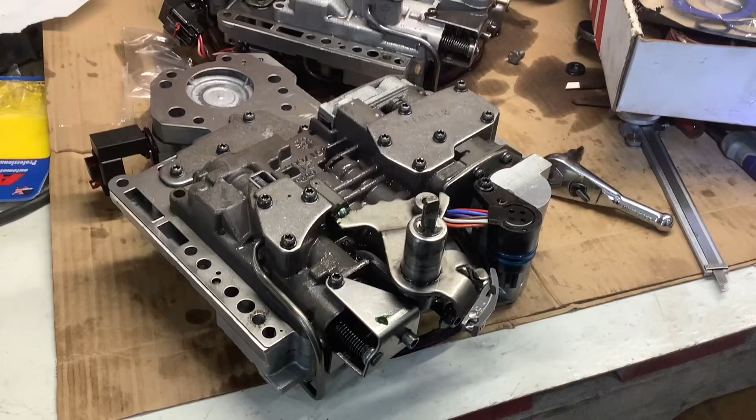So everything has been done to it. I made sure the adjustments are correct. I went ahead and swapped this out, and this was actually loose. So what I did was I got a bolt and I stood the bolt up, and I got a pair of channel locks, and I just squeezed it together, and that essentially made this a little tighter. It doesn't wobble around.

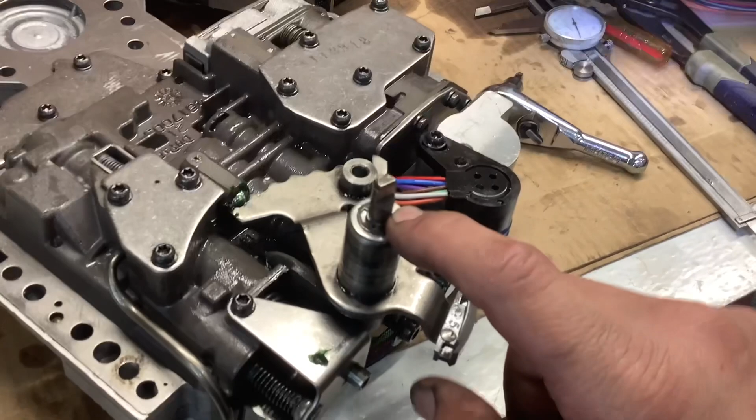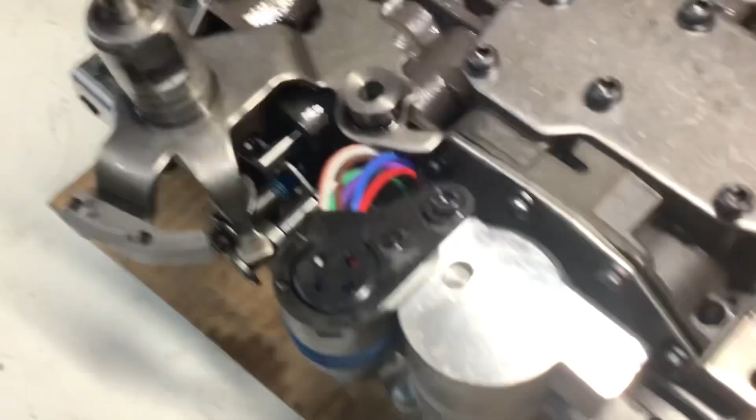I replaced the seal here. I'm going to be replacing the seal in the transmission. The adjustment here for how long the distance is from that curved piece to the plunger, that needs to be a certain distance. And that distance, how I got that was put the distance here, which is 625.

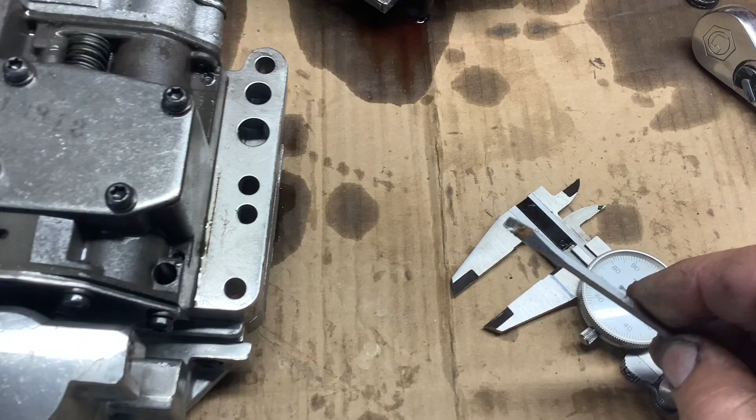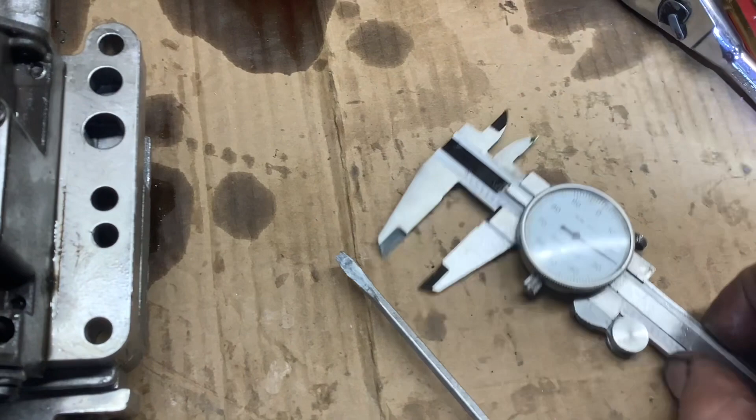I got a marker, and with the white marker, I painted this. And then all I did was scribe the white line on the screwdriver. Went over here and pushed down the throttle valve and aligned the white mark. I don't know if you could see that. I'm looking through the screen, so let's see if I can do this. And you have to make that adjustment with this collapsed all the way down. And with it collapsed all the way down, I just lined the scribe mark out with the crescent right here. And that's how I got the depth.

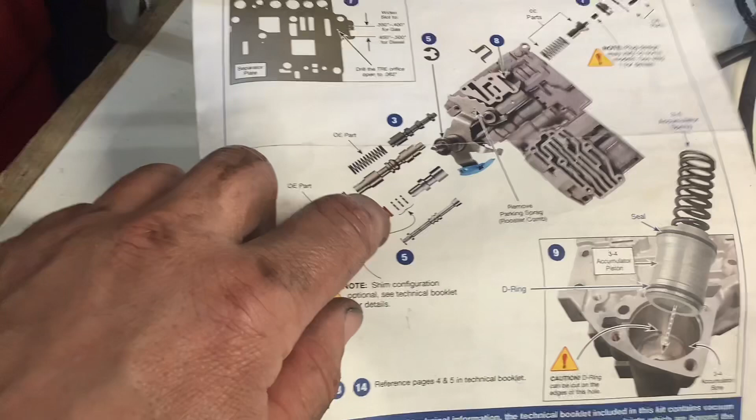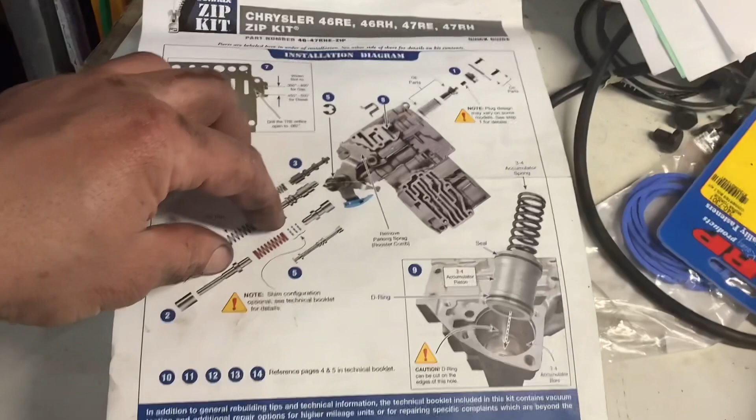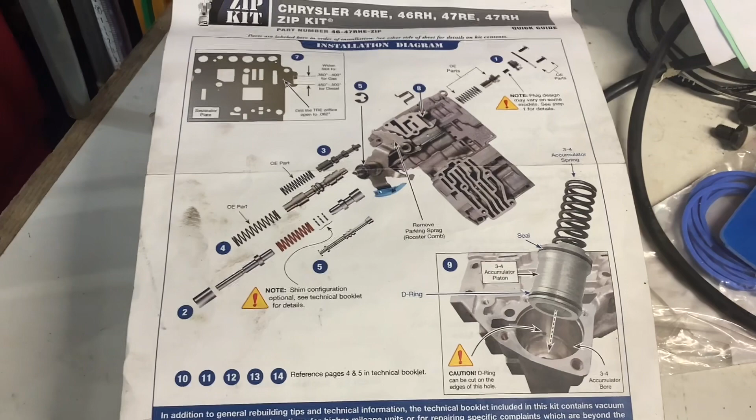There is one spacer. I used one spacer. This is a stock transmission. I didn't want to delay the shift. This, as you gain speed in the transmission, the pressure goes higher and higher and higher. The more spring pressure you have here, the more delayed the shift is. So I wanted to delay just a little bit. So I upped it 7 psi, which is basically one spacer. And that's 14 psi. And that's outlined in the instructions.

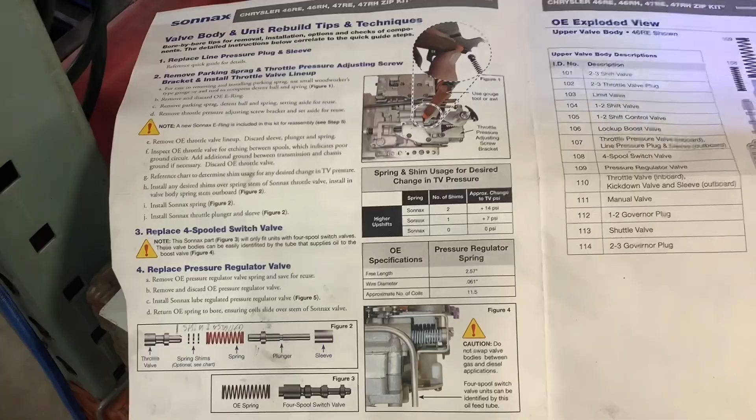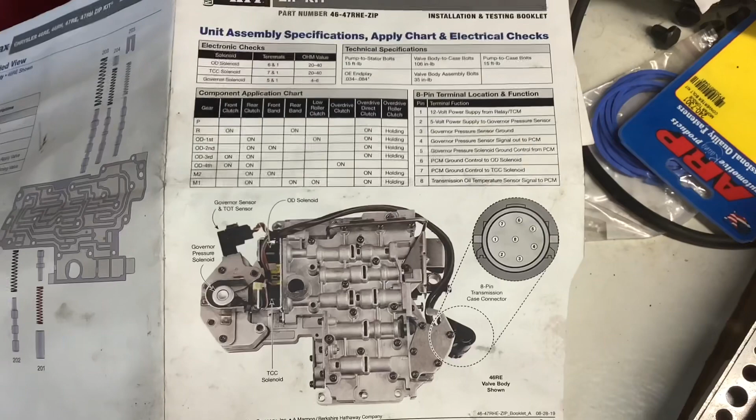Which would be, ta-da! All right there. Sorry if it's shaky. Sometimes these high pixel cameras are very sensitive to movement. And of course, these are all pressure related if you want to delay or do anything like that. There you go. Some information here. The shift kit. So that's about it. That's what I've done.

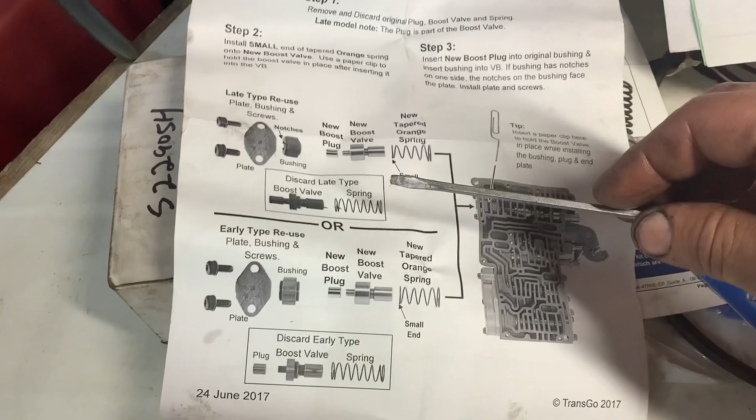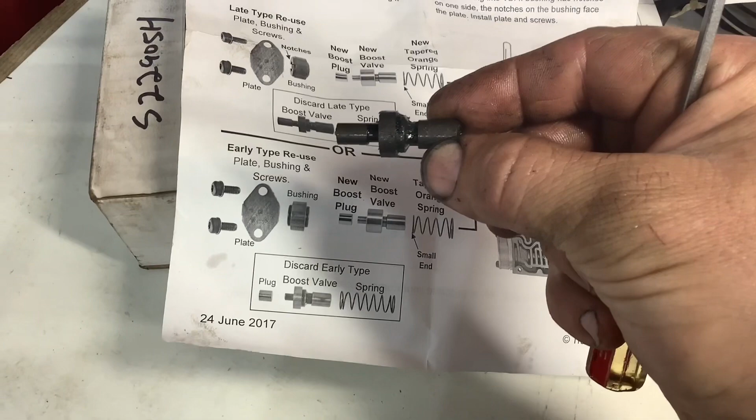The boost valve's been replaced. I had, what is that? It's driving me nuts. Oh, just some garbage. There we go. So this is the one I had. You got two different types. At any rate, you want to discard them and put the new boost valve in its place. Here's the old one. And that's just assembly lube for the transmission. Here's the old spring. Here's the old valve. This is the old style, see? And of course this is the new style installed. So that's where I'm at.

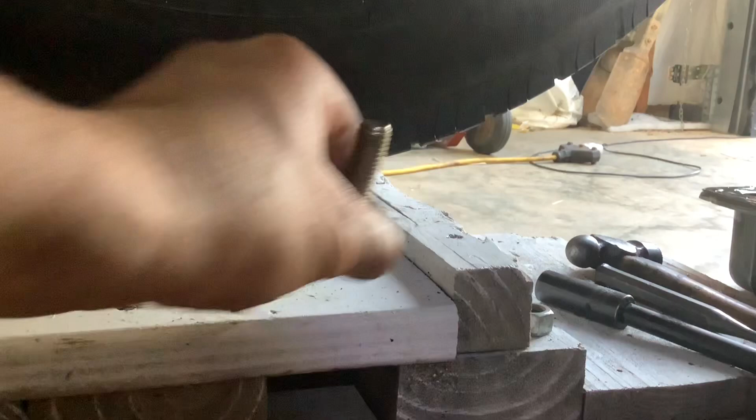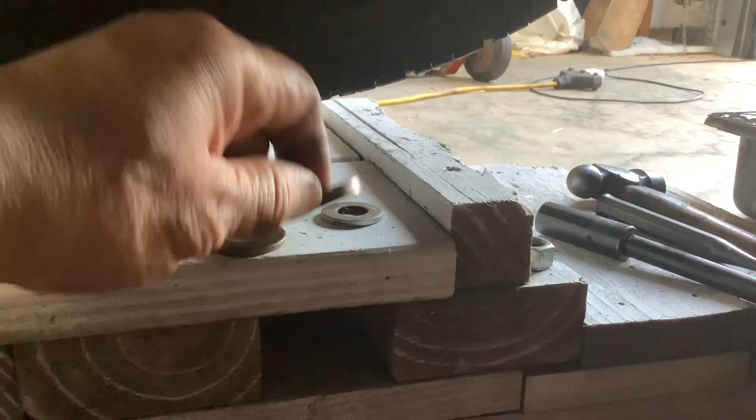And I'm also going to be replacing this seal. I'll explain that. So here's where I'm at. This is how I do this. I get a bolt. I get a washer. Put the seal there on top. Run the bolt through. Put the washer on the bottom. And of course, tighten it up.

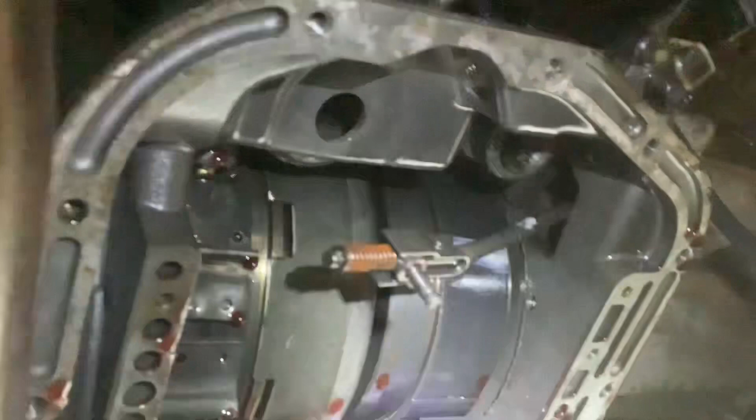It appears that this has been rebuilt. It's just got a little bit of incorrect information on how to shift. So I'm going to adjust the bands. I did not put that white stripe there. That was there on that reverse band. So that's it in a nutshell here. I'm going to adjust these bands, put that seal in, and start putting everything together. I just got to replace this connector.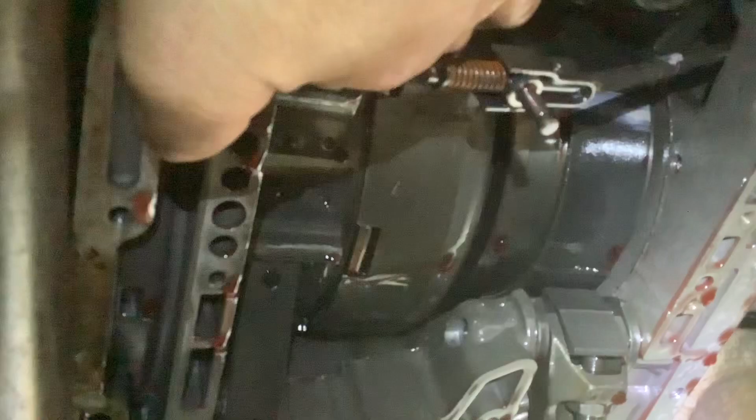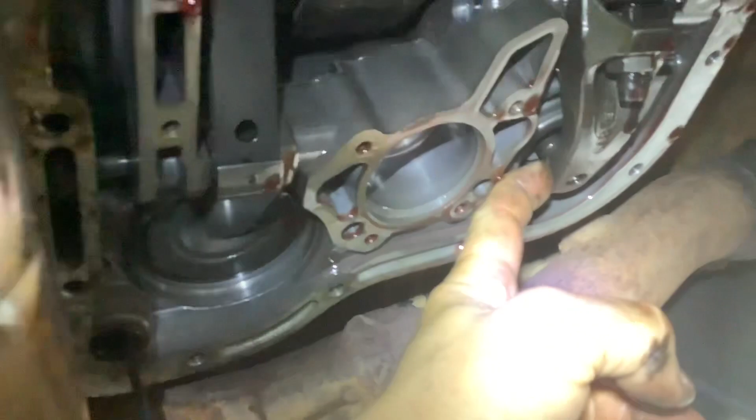So that's where I'm at. I gotta adjust this still. It's not bad, but of course I'm just gonna check it. And all the material on the bands, it really looks decent. So I'm just gonna adjust them and do that. This is actually, I don't know why it was hanging up before. I did work it a couple of times and it seemed to clear up. So I'm just going to leave it at that. I'm going to test it, okay? And if it doesn't spring back like it should, and the test port's here, just add some compressed air and it should apply, and then immediately when you take the air out, it should return to the rest position.

And again, make sure your transmission is cleaned. It is paramount that you keep the contents in here clean. That's why I power wash what I can. And as you can see, even power washing doesn't get everything, because you're up underneath the vehicle and you can't get the wand in certain places. However, I'm going to make a curved end for the wand so I can get in those tight areas. All right.

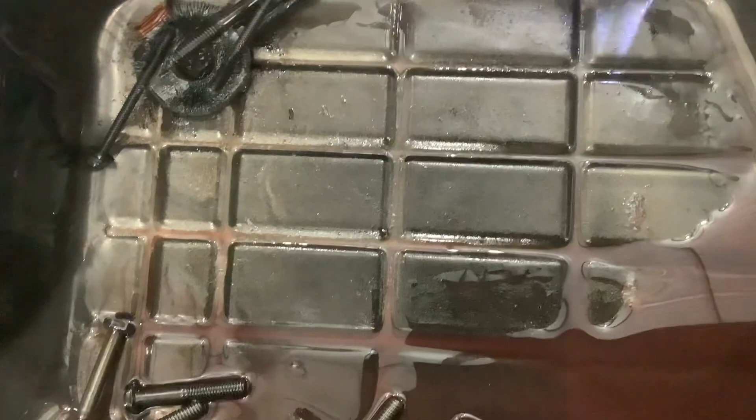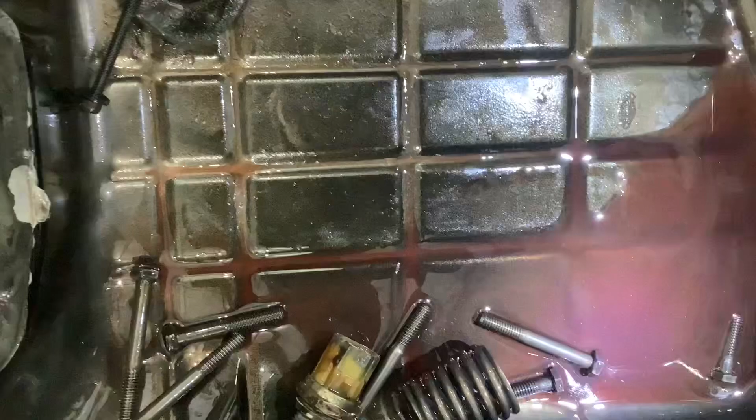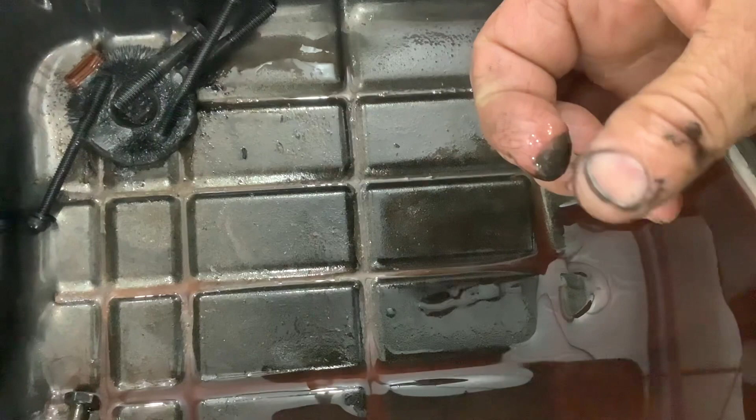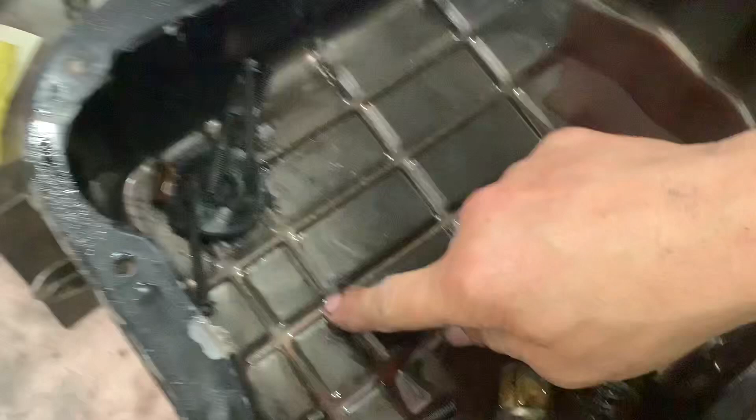All right, now that I got it from underneath the vehicle and a light on it, I can actually see a little bit of sparkle. And right here, it's got some thrust surface wear. And over here, I've got some gold. Well, not gold, but brass, sorry. It looks a gold color and mixed with some more thrust surface.

All this grit, this is what destroys planetaries. This kind of stuff right here, it just destroys the oil pump, the planetaries, sun gear. It's terrible. So when it comes time, I'll be rebuilding this transmission as well.

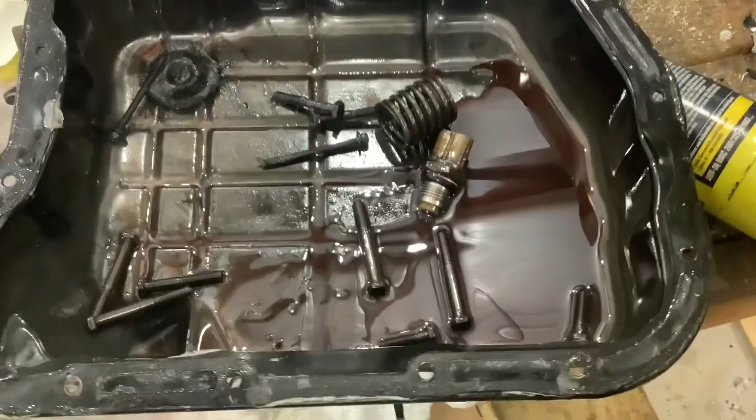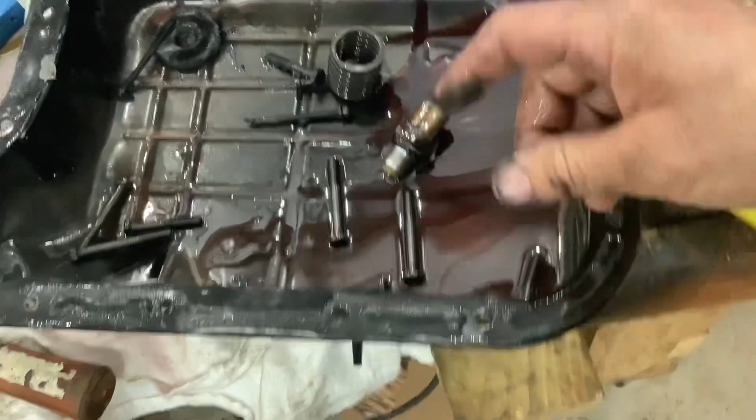I installed the O-rings on the 1-2 accumulator. Here's the spring out of it. I'm going to reinstall this, okay? This is just a stock transmission. I just want to up the, or delay the shifting of the transmission. So I just added that washer underneath the valve in the valve body. So I'm going to be cleaning this and putting it all back together. I got tons of filters, so it's going to get a new filter. All right.